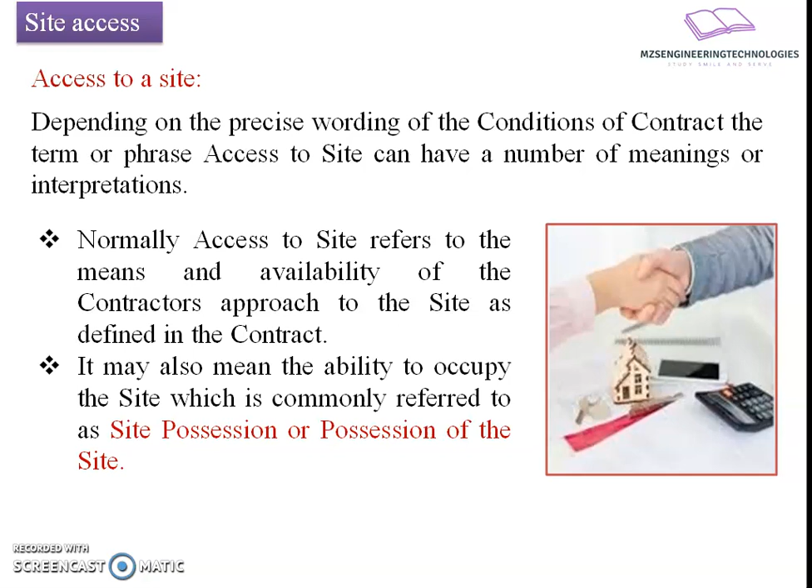Now, if we want to know why it is necessary, the things we can list for the necessity are the transportation and delivery of construction material, plant, labor, and equipment. For this, access is required for the contractor to allow the installation and connection of utility services necessary for the construction and indeed operation of the completed work. To facilitate the contractor in being able to transport, install, connect, and deliver all the above, it must be available to the contractor at the appropriate times. At any time he can approach the site and do things as per his convenience.

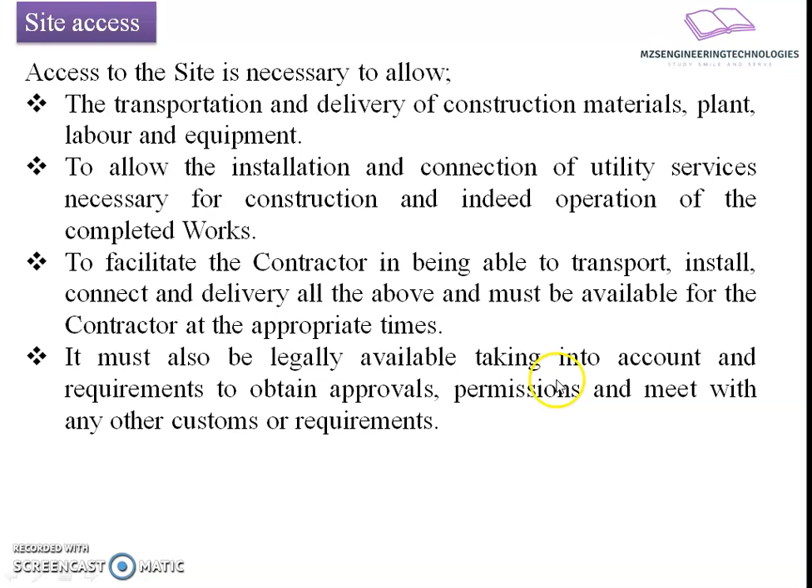It must be legally available, taking into account the requirements of obtaining approvals and permissions, and meeting any other customs or requirements like subcontractors and suppliers. So we are going to give him a right to do that, which we call site possession or site access. The pictures below on the slides illustrate what sort of permission we are going to provide to the contractor so as to have site access.

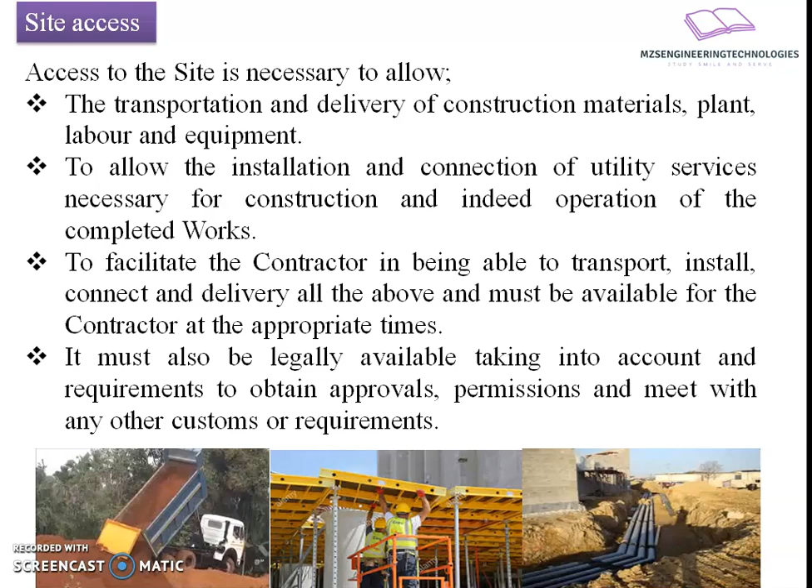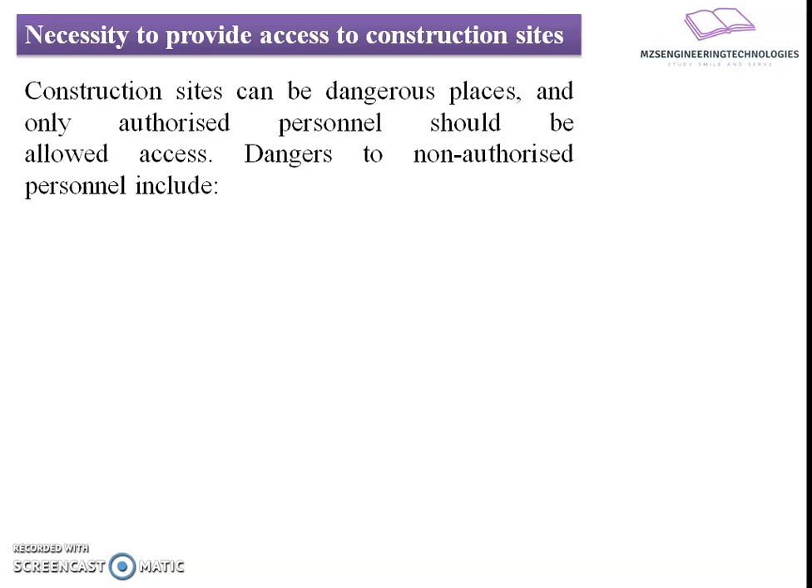Now, to quote another meaning here, site access is a regulation for other persons who are not involved or connected with the construction work. So it is said to be an approach to the construction site. The construction site can be a dangerous place as there are a number of works going on simultaneously. The levels of works are different. The machinery and equipment required are heavy or lightweight, and if a person who doesn't know what is going on at the site comes there, there is a chance of danger to his life. It may cause heavy injuries or it may even cause death. In that case, we are going to have a restriction, a warning to people that they are not able to access this particular area.

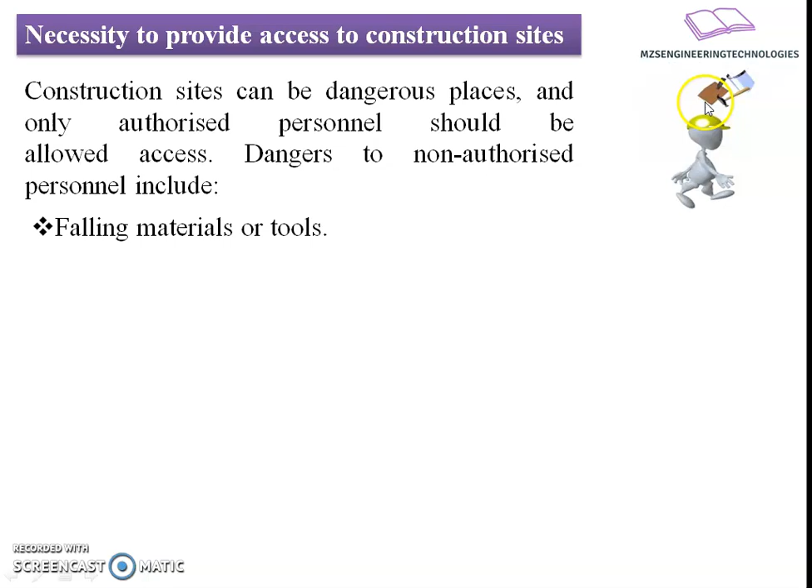Likewise, the secondary meaning we can put here relates to providing access to the construction site. The construction site can be a dangerous place and only authorized persons should be allowed access. Dangers to non-authorized personnel include falling material or tools. The clip art here shows various activities going on, and if a person who doesn't know what type of activity is going on in the surroundings comes in contact with that operation, there is a chance he will meet with an accident due to falling instruments or equipment.

The second part is falling into trenches. As we know, there is excavation work, which may be done for the foundation, laying out trenches, or many other things. A person who is not aware of the work being carried out at that place may be subjected to such an accident. He will fall into the trenches. Next one, falling from a height.

Now this is the regulation which the contractor has to provide for their workmen. Falling from a height means a person is working at a higher elevation without any precautionary measures, so there may be chances that the person is subjected to danger and falls from that particular height, leading to injury or loss of life.

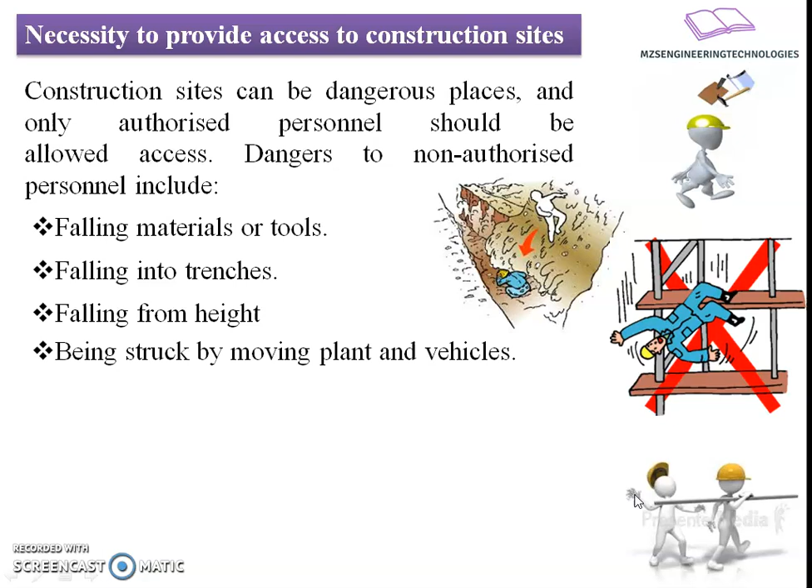Being struck by moving plant and vehicles means here an operation is going on. The clip art at the bottom corner shows that a person is holding a pipe. He is carrying the pipe, but the person who is coming from the other direction was not knowing about the danger he is going to meet, and suddenly he gets struck with that equipment, and thereby it causes certain injury. Such things have to be intimated earlier, and that intimation we can call construction site access. Who can access this particular area?

Standing on a sharp object, like a very narrow strip, he may fall and be subjected to danger. Coming into contact with electricity or hazardous material, there may be chances of open wires, open cuts, or even open trenches, and the person who is not knowing about it may fall or meet with an accident there.

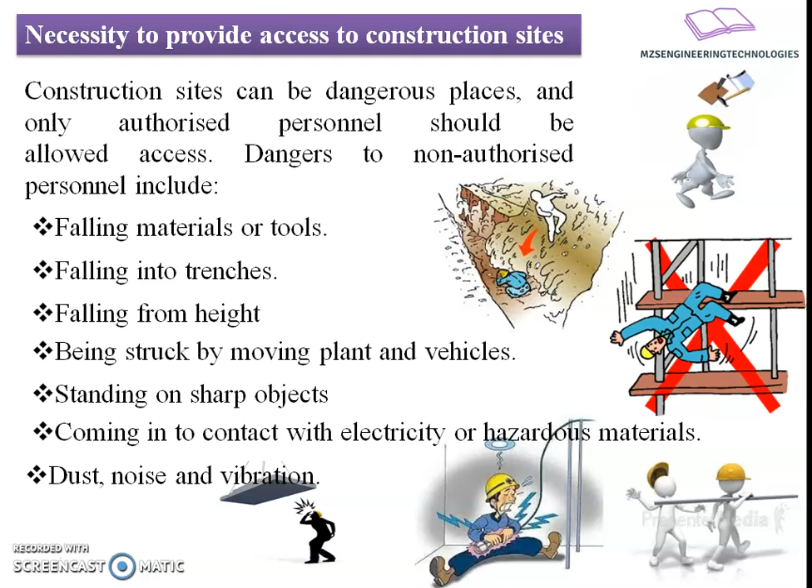So if we provide this type of restriction, we are going to restrict the people who are not concerned with the construction work from approaching that area, and we say the construction site is there, and movement of vehicles and unauthorized persons is banned here. That is the third secondary meaning we can take from the necessity of why we require access to a site. Noise and vibration caused by the operations done within the premises may have health hazards, so we have to provide these warning signs also.

If we take a review of what has happened in the past in the construction industry, it shows that 56% of the injuries or fatalities have been due to falls from a height, because labor working at a height without any safety provisions like hangers meet with accidents. In many cases we found that 56% of the fatalities on site were from falling from a height.

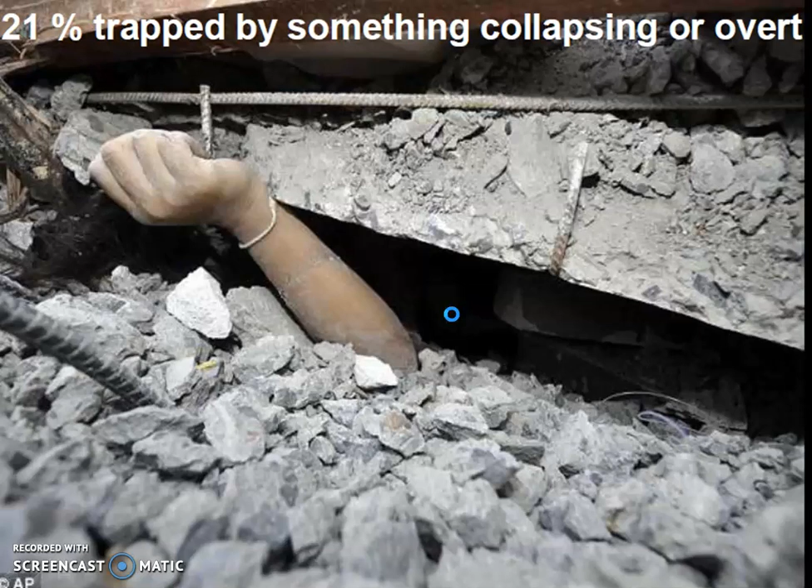The next one is 21% of the total fatalities have been due to the collapsing or overturning of structural elements, and thereby the person is affected by hazards with reference to it. Now 3% of the people have injuries and fatalities from contact or mishap with the construction equipment at the site.

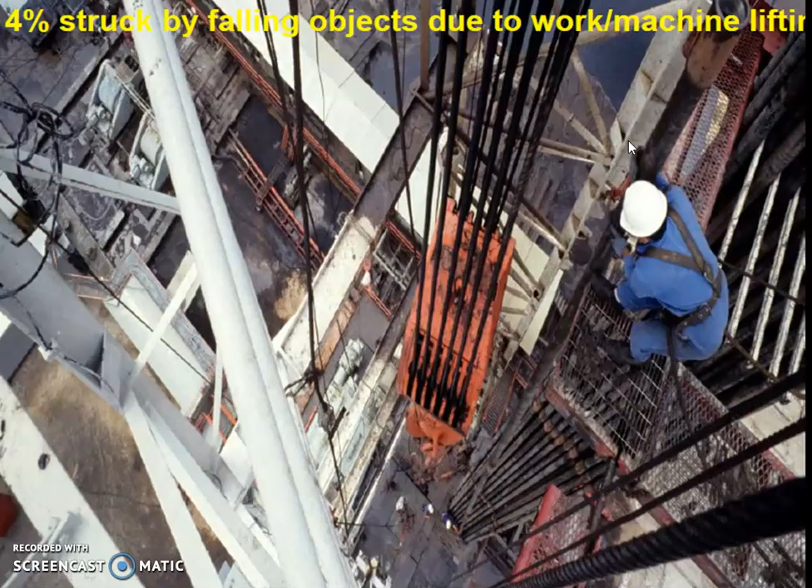When we take a look at the electricity supply, sometimes there may be open wires, or the wires may get clogged, and people who come in contact have certain injuries. 5% of fatalities in construction sites were from contact with electricity or electrical discharges. 4% are struck by falling objects.

A person is working at a certain height, and the person moving in the premises doesn't know what work is going on, and suddenly the instrument, equipment or material falls on his head, and he gets injured, and thereby there is a loss of life, like from lifting machines or other things, which count to be 4% of the total injuries at a site.

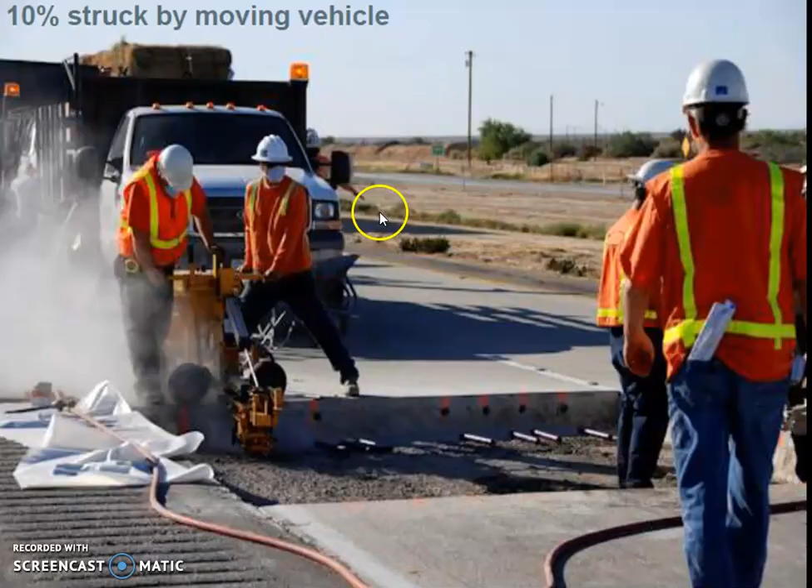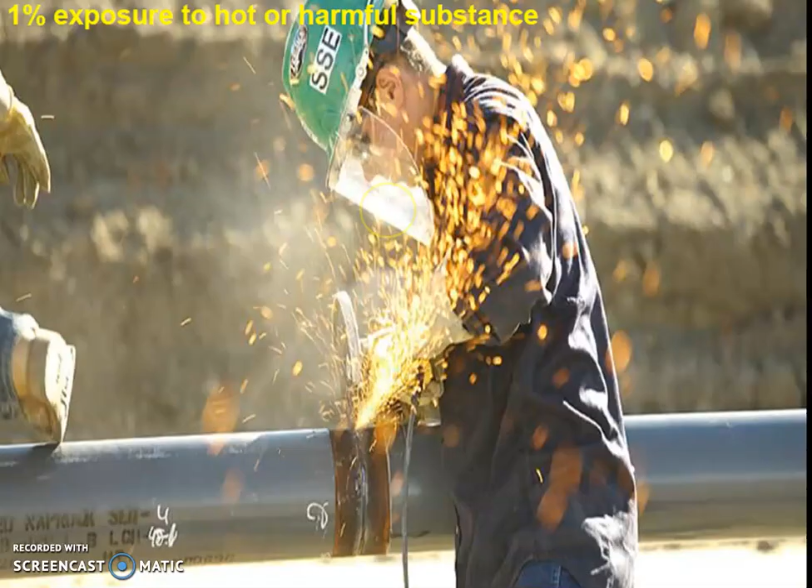10% are struck by moving vehicles. People are working with their own equipment, and there may be a large sound. He or she may not hear the vehicles whistling and moving nearby, thereby causing loss of life. Then 1% are exposed to hot or harmful substances during operations like cutting, grinding, and welding, having an impact on health as well as injuries.

Now, the necessity to provide site access, in addition to what we dealt with in technical terms and the contractor benefits. In addition, the construction site has certain challenges: its nature and layout are subject to frequent change. There may be modifications from time to time based on restrictions provided by the local authorities, and for that we have to put the things in place.

Next, access is required by a large number of contractors, suppliers, consultants, and so on. The third one, sites are often in highly populated areas, so we have to take extra care about it.

It may be necessary to maintain user access to neighboring sites or part of the site itself, and there can be time pressure to complete the work quickly, and based on that we have to provide secure access to all the component parts of the construction operation there.

Sometimes there will be a protest, or there will be a theft, there will be vandalism, and sometimes people will show their opposition in an extreme way, like committing suicide at the site, and so on. So likewise, to avoid such occurrences, we require proper access to be provided towards the site.

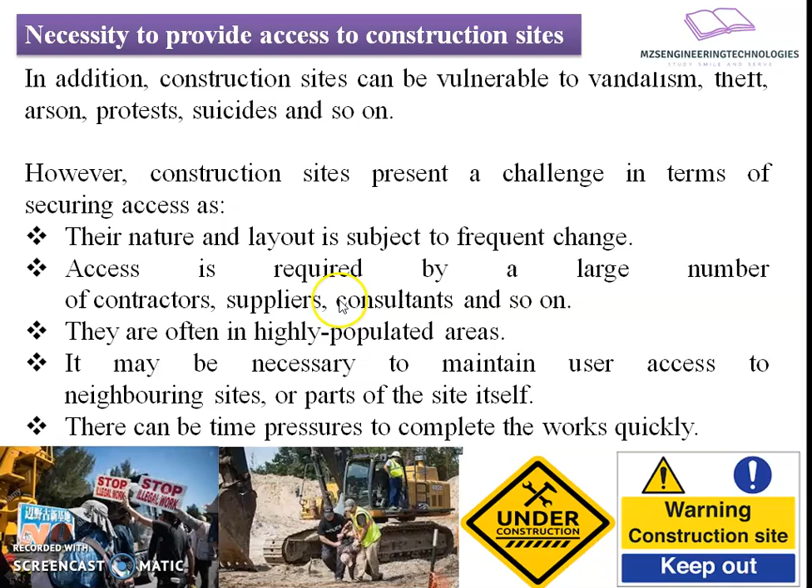If we talk about the regulations maintained in the construction industry, these have been put into documents like the Construction (Design and Management) Regulations. The CDM regulations require the prevention of access to a construction site by unauthorized persons, and that is stated here as: where necessary in the interest of health and safety, a construction site must, so far as is reasonably practicable, and in accordance with the level of risk posed, comply with either or both of the following: have its perimeter identified by suitable signs and be arranged so that its extent is readily identifiable, or be fenced off.

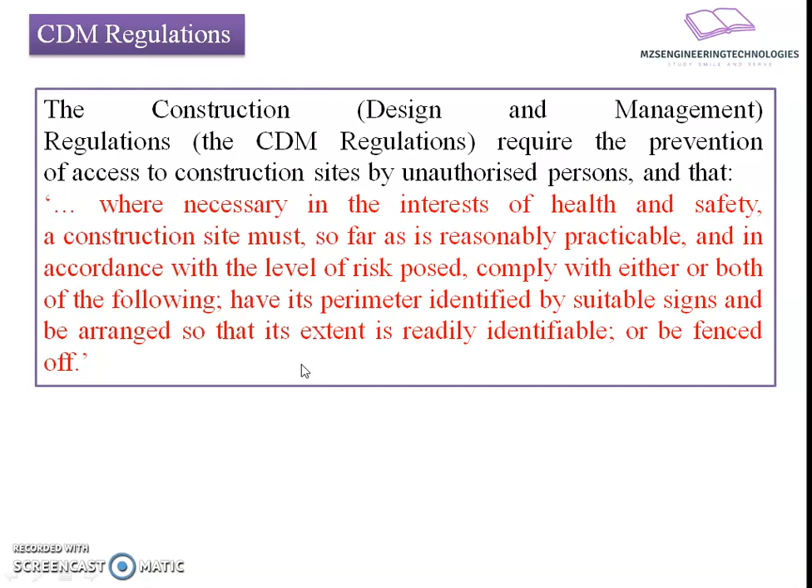Means here we are going to have banners nearby it, display boards nearby it, and a control line around the construction site, so that it can be completely protected, and there will not be direct access for any unauthorized person to move into that particular area.

Now we have a long list of such acts which were provided in the Indian scenario. The Building and Construction Workers Welfare Cess Act 1996, the Building and Other Construction Workers (Regulation of Employment and Conditions of Service) Central Rules, based on the compensation which has to be provided after meeting with accidents, like insurance companies and their recommendations. Some acts have been prepared in reference to conditions of employment and service conditions.

The Building and Other Construction Workers (Regulation of Employment and Conditions of Service) Act 1996, the Fatal Accidents Act 1855, the Factories Act 1948, the Workmen's Compensation Act 1923, the Employees' State Insurance Act 1948, the Contract Labour (Regulation and Abolition) Act 1970, and the National Building Code of India 2005. These are some listed acts which have been prepared on the basis of how to maintain the safety of life at a construction site, for the skilled and non-skilled persons who are involved in it.

So what we require at the site is four basic things. There is a rescue team which is ready for any untoward situation, an emergency center where we can have first aid, communication with nearby hospital services, and in case of an outbreak of fire and other things, we should have particular fire hazard teams available with us.

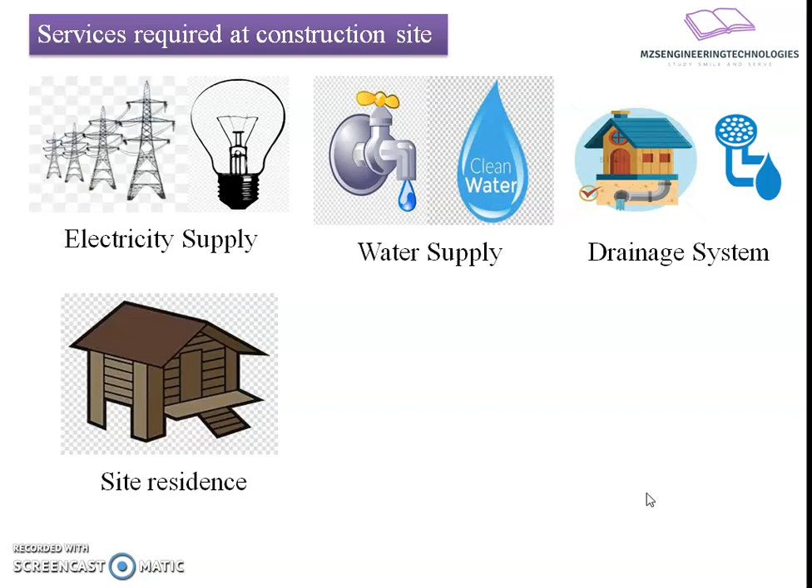Now services at a construction site require the electricity supply, the water supply, the drainage system, the site residence, the site office, and the security services. Because at the construction site, sometimes we have to prepare sheds for laborers. For them, we have to provide a good water supply scheme. We have to provide a drainage system. Then we have to provide electricity, as well as the skilled labor should be in contact with the site person. The site person should have a sitting area where the discussion and operation works will be discussed.

And to control the site, we can have security services in terms of approaches, in terms of material supply, and in terms of recording the things which are going in and out of the site. Now health services are one more additional feature which we require to be provided at the site, so as to have safety towards life.

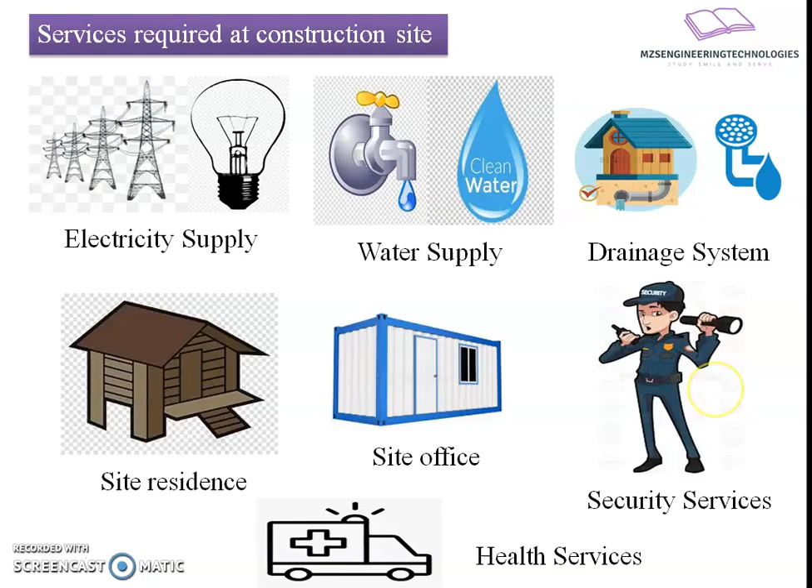So with this, I will end today's lecture with reference to site access and site services.